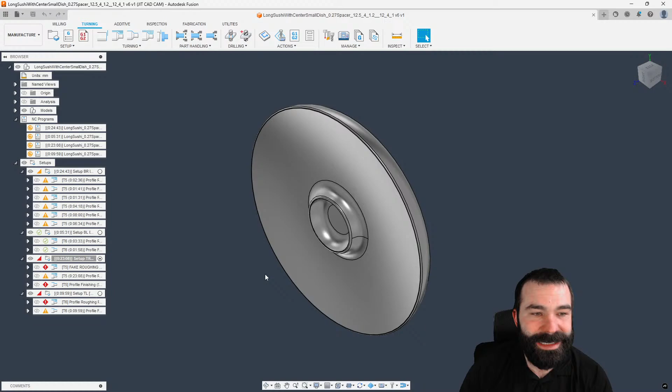So if you guys didn't know, this is kind of neat. So he's running the same kind of tool constantly across his part for all of his tool paths. And with that, he's now actually set up with setup 1, which is work offset 5. He's going in with another work offset for 6. And he's done his setup that way. So he's not doing tool changes, he's doing work offsets, right? Super neat way to go about it, like I said.

But his problem is, let me pull up his ticket here real quick. Guys, if you ever have any questions, you can use the actual support email down below. But he's trying to make a sushi board with a holder for a small center dish. As you can see, right here is his lovely sushi bowl with his center dish. I am a big fan of sushi, by the way.

That being said, his question is around the first two setups. The block of wood is attached with screws and a chuck. And I'm going to show you guys this, because in the world of lathe turning, if you didn't know, he's got some questions about a dovetail or a chuck that's holding on to some material in space. Now, I've covered this in a few of my videos, how to approach this, but what is happening is he's adding a 0.27 inch spacer. Thank you for using the inch system. And that is simply removed when flipping the part.

Now, what's happening when he actually goes into the CAM side of things is the dovetail recess that's used to grab the part, and where was it here? He had something else. So the first operation is, I'm cutting air and would have been the spacer, right? We're going to go ahead and take a look at this. So again, as you're seeing, we're starting to work on the back side of his part.

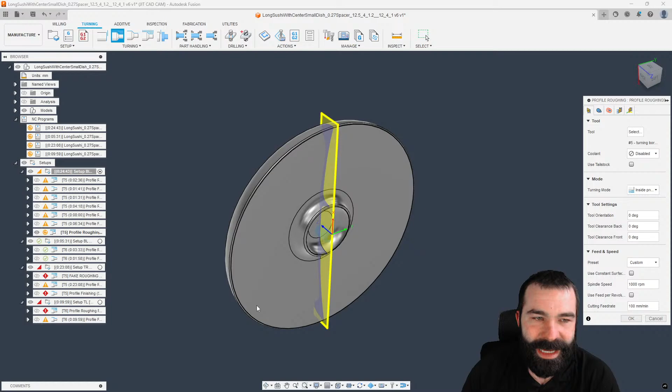But if I go up to the top and I actually recreate his toolpath from scratch, again, making sure we're still using the same tool from what he has here. So let's go ahead and cancel that real quick. I need to go down and activate the proper setup. We're going to do roughing and I'm going to hit OK. And what you're going to notice, at the very least, I actually got a good toolpath with X trimming, of course.

Now, when we look at his toolpath, the reason why he is getting that problem is he's not getting a path at all. And that's why I like to create a brand new path from scratch. And then I would go in and I would do what's called a compare and edit, right? So why is it that I'm getting something different than what he's getting? As you can see here, Fusion's going to show you anytime you have something different.

Now, again, we have a difference in our back offset. We also have a difference in our cycle and a few other things here. Our front offset looks to be the same. Obviously, we can keep going through here, allowing grooving. Yes, this all looks good. But let's go ahead and change some things around, right?

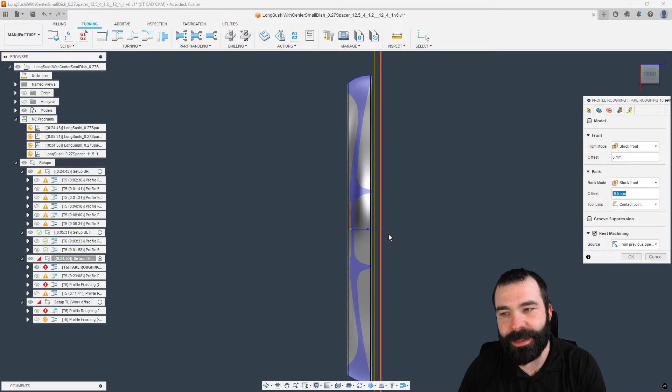So one, we have outside profiling versus inside profiling. Again, I like to start from left to right. So let's just take a glance at what he has. His geometry in this case, he's working from stock front to stock front minus 6.5. Now, as you can see, because he's using a roughing toolpath, there is no model within this Z boundary to contain that toolpath, right?

So this is where his dilemma is going to come up, because he's wanting to do his vertical passes, which means he's kind of doing a facing operation outside to inside. So if he wanted to face off that little lug that is sitting here, and we're going to model up that lug here, if he wanted to just face it off, he should have went turning face. What that would allow him to do is accomplish what he's trying to do when it comes to facing off this part.

Again, he's going to work based off our model front. We actually want to go stock front. And then if he needed more than that stock front, obviously he could add more in there. And then his passes tab is where he can actually calculate multiple stepovers, right? So as you guys can see, we can create that toolpath to go in and face off our part.

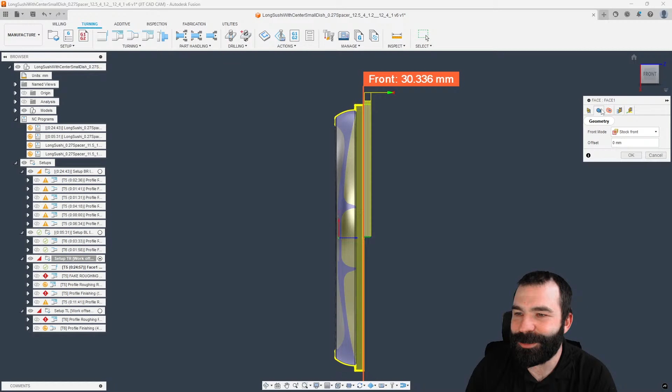Now I'm going to move this up to the top just to make sure we order this the proper way. And as you can see, we're now facing off the front of this part, but it looks like we're not actually facing to where we need to be. The reason for that is because yours truly went in here and made a couple of changes. We actually want to machine to our model front from our stock front. So let's get that switched back. Now you can see we're making those facing passes to take off that lug, as he was saying.

Cosmin, is this already looking better for you? Go ahead and let me know in chat.

Now, if he knew the size of that lug he was working with, and again, this is the importance of having something modeled, he could also change his facing if he really needed to. He could change the radii of the facing as well. So again, he has an outermost, which is stock OD.

Maybe that outermost is going to be much smaller in diameter. And as you can see, we can make some changes to this. Now, we are rapiding from a clearance. Again, we like to make small changes, but you can see where my blue lines are only cutting down here in the center area. Now, this is where I'm going to change gears real quick and show you kind of a trick why you would want to model your stock in this case.

So if I jump back to the design side of Fusion, now he does have a lovely body already drawn up for this part. He also has this very lovely sketch that he used for his revolve profile. Now I'm going to edit that sketch. And the reason why I'm going to edit that sketch is now I could sketch in whatever I wanted for a stock, right? So if anybody knows me, I love to use rectangles. They work quite well here.

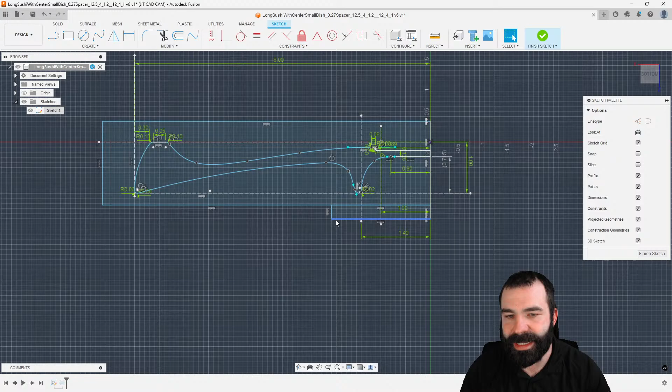We're going to go ahead and actually undo that real quick because we hit the wrong plane. One more time. Again, there's our first rectangle. And then let's just say our dovetail is going to reside somewhere in this area, right? Now I'm going to move this back, use a couple of constraints like horizontal vertical so I can align it to my origin. I also want this rectangle to, of course, start on center. And you guys could dimension this out as much as you want and get it tighter and closer, right?

Now, the idea is I need to create a second body. And that second body is going to be based off the fact that I want to spin a stock profile, right? Let's go ahead and pick our axis here at center. And then we can add in our additional profiles using control. If you guys didn't know, you could hold control. And then I would like this to be a new body, right?

So as you're seeing here, I am going to create a representation of what he's going to create based on what he's done so far, right? So again, we have two bodies here. One is now our stock, one is our finished part. And with that, we could jump back to manufacture. As you're going to see here is when you're starting to do these different machining things, right? If I was in this setup, going to use that stock body, right, from solid.

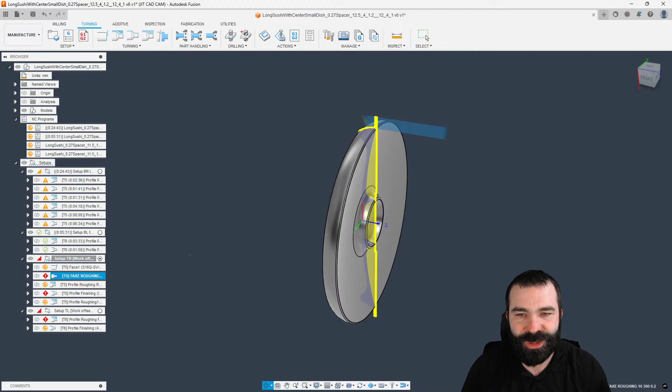Now, I would recommend, of course, you're going to start with the traditional approach of making that backside hub to hold on to. Then you're going to do the front side. Then you're going to end up back here on the back side. But what I'm going to show you is because that stock is now selected, all of our tool paths are actually going to recognize that at the end. So again, as you have that freedom, if we go and create brand new tool paths, or if I regenerate some of my other tool paths, of course, we can use that to your advantage.

So again, what he had happen here is he started to adjust too many things. And because he was using a roughing tool path without a body, he could never recognize what was happening, right? So again, we could actually set this all to model back. Again, we could set that to 0. And outside, I believe, was one of the other ones. So we want to switch to inside. And we should now get a tool path, but we're still getting errors.

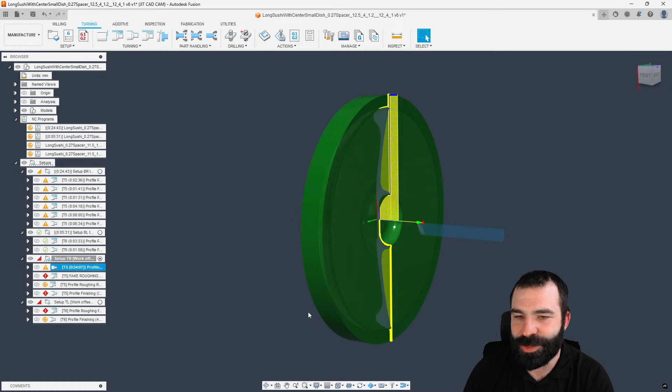This is why I always tell you guys, it's so much easier to go in and actually use a roughing strategy to create what you need or create a brand new tool path once you start editing too much stuff, right? So again, if we drag and drop, we could say yes. Obviously, I need to make a few changes here as well, and that's because we're starting not from model. Again, Fusion's trying to think that you've already faced this off. So I may want to start in this case from stock front and then work all the way to model back. Again, I know this is a good tool path because yours truly created it, of course.

And now you can see, of course, we have all the fine things like I can adjust out from here. I would like to use things like rest machining, and you'll see why this rest machining is valuable. We won't be machining all of that extra stuff, but it looks like in his case, rest machining is actually causing a lot of his problems as well. So again, we could go in, we could try a different, instead of previous operation, stock setup.

And as you can see, now that stock setup is actually trimming his tool path to follow. Again, we made that lug based on our stock. So again, we could modify this more. He wants to do vertical passes. He went outside to inside.

If we allow both radial and axial grooving, now you'll see we're starting to work down into that concave shape of the part. And we're starting to do a facing and roughing all in one. Again, because certain tool paths in Fusion are model aware, in this case, face is aware of where the front of the part is. Now, the other tool paths are all looking for a profile to machine to. That was where all of his errors come from.

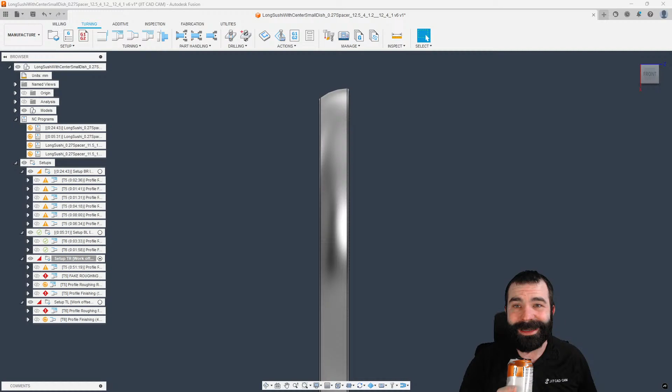In the meantime, while some of you guys bring up questions or problems you may have had this week, I'm going to snag another drink here. And I'm kind of curious, with all of you out there, how's you guys this week? How's everything going? I got a big trip planned. I got to drive from here all the way down to Texas and back to Chicago over the next 3 weeks. You guys haven't seen my post about that yet. How's everybody else this week been? Crazy? Not crazy?

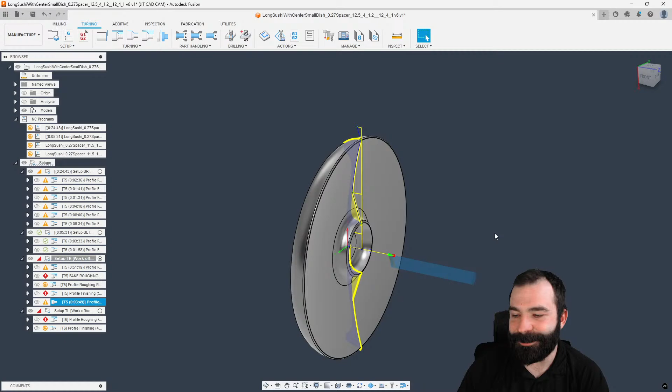Awesome. ARE, I see you out there. Cool. So you want to know about how to do a 0-point system, and with a 0-point system, how you could actually set up to do probing. No problem. Yeah, 100% Cosmin. I see what you're saying. It is wood. It is very forgiving.

So let's talk about a 0-point system. I like that question a lot. I'm trying to think what I would have. You know what? I think I'm going to go for, oh, where is it? I don't think it's Milling Monday. It might be a Fusion Friday thing. Yep. Always go for the dummy part, right? So this is a good part because it does have the ability to set up probing.

And the idea would be, with the 0-point system, you would have a pallet or you would have a known point on your part, right? So the question is how can you use a 0-point system and probing inside of Fusion 360? Well, the great thing is if I was using a 0-point system, I would probably have my WCS located on a specific point on that jig plate, especially if you're, like I said, using pallets.

There's some point of reference that can be the same on everything. Now, Fusion would need to match that, right? So what I'm going to do is I'm going to go in and I'm going to set my origin based on a selected point.

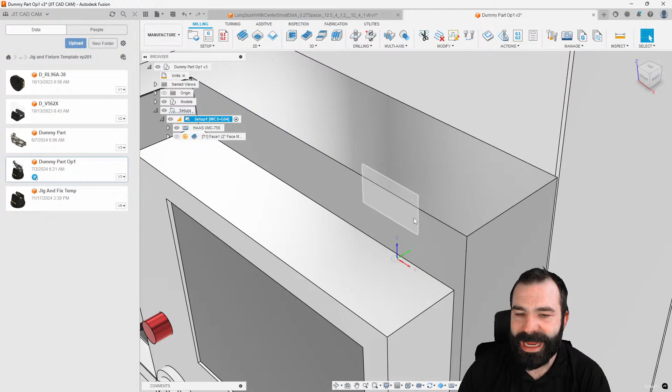And in this case, the bottom center of this actual pallet is what I'm using. I have made videos on this, guys, about using a joint origin to define that location, right? So first and foremost, in the world of DWO or TCP, tilted work plane, your machines, or if you don't have it, we can get away with quite a lot of things. So again, we have our origin set.

Now I'm going to go in and I am going to do an inspection and I'm going to do probe WCS. The very first thing I always have to do is I have to give Fusion a probe. Now that we have that probe, we can determine what kind of probing do we want to do. In the case of this part, as you guys can see, I'm actually going to pick the stock model here because I modeled stock. I know it doesn't make sense. We get it. But now I can set it based on Z or maybe X, Y, whatever that's going to refer to at the end of the day. So as you can see, it really is as easy as this right here.

And what's happening is when we go in to probe this block, we are actually shifting our work offset. So I say that because you may not want to shift that work offset, right? So we may want to use 2 work offsets in this situation. We want a consistent, well-known position in the machine, and then we want a floating position. So how that works is you have the ability to do what's called overriding driving WCS, right? So what I want to point out for you guys is you can call up a specific work offset to come in and probe with. And that work offset could be that bottom center of that fixture or that pallet, right?

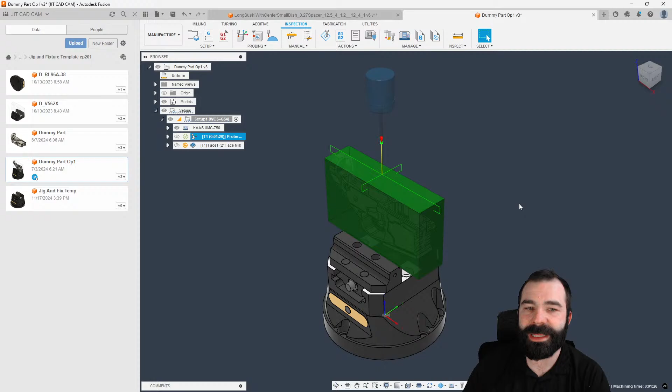Now, what does that look like on your machine controller? Well, I don't have a machine controller to show you guys, but in theory, initially your 54 and 59 would be a direct copy of the two. And then upon creating this WCS probing, you would see the shift in 54. And the reason why you would see that shift in 54 is because our setup is 54 and 59 would never move. So I like to use something like this with the overriding driving WCS.

If I had to deal with a bore or something, and that bore is kind of moving around my part a little bit, I can go in and find that bore individually each time and use a specific work offset to find it, while updating a different work offset for machining. Hopefully that makes sense, ARE. You can go ahead and let me know in chat if it does or if it doesn't, by all means.

So again, I wish there was a way I could show you guys this. Can I print screen this real quick? I can, look at this. Technology at its finest, right guys? Let's go ahead and balloon this up.

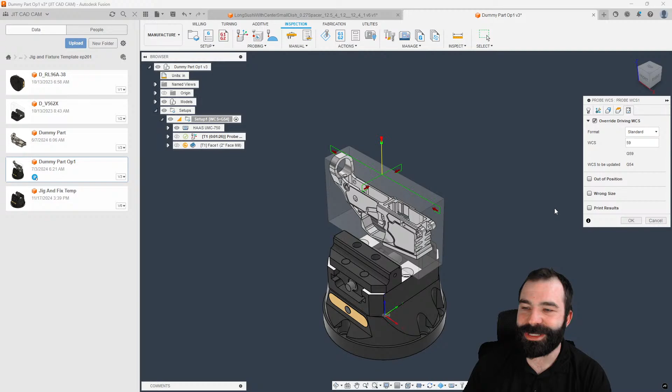What do you want to call to probe from? And then it will go back and update whatever your setup is, right? So again, usually the way I do it is you just copy one over to the other and then you let the one float from there.

In the meantime, anybody else got any other questions? I could go ahead and post this out for you also. In this case, we'll just go ahead and use the next gen post. Sometimes seeing the G code tends to help people out as well, right? So again, you can see it called G59. Even though my setup is 54, it goes through and does its probing routine, as you can see here, and it probes all of that stuff.

And then it should be updating 54, which it's been a minute since I've had to look at this code, as you guys can imagine. So it's actually S1 is the output. So S1 is 54 in this case. And we can test that to see if yours truly is lying to you guys or not. Let's go ahead and switch from 54 to 55. And then we can repost that code while we wait for some more questions to come in as always.

Again, now you're going to see we're working with S2. Why do machine manufacturers do this? I don't know. Why can't it just say G54 or G55? It's always got to be some variable that you got to track down. But again, we called that 59. We went to a location to probe. We updated basically in X. We updated in Y. And then we overwrote whatever that original work offset is.

So if we were to throw some toolpaths at this real fast, go ahead and face it. And then we're going to actually do our probing routine. You'll see it all kind of checks out the same, right? So again, we have our facing from 55. We then go in and probe from 59. And then from there, we're updating 55 still when we find that actual location. Cool. Any other questions outside of that, guys?

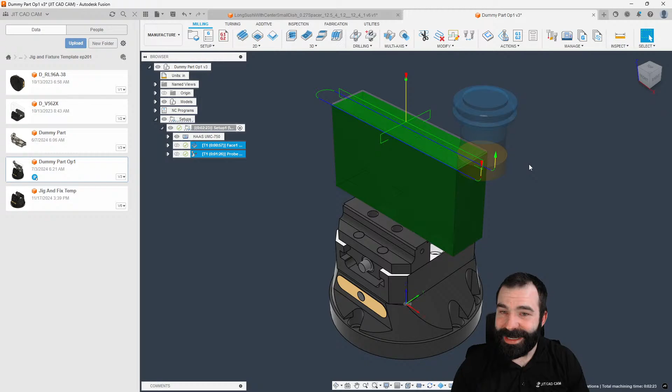One thing that somebody did ask me earlier this week is the fact that even though our actual WCS is down here at the part with probing, we are doing all of the math when we probe our part, right? So you don't have to, and I've seen this where people think, oh, well, since I'm probing top center of my stock, my specific location needs to be top center of the stock.

That's not the case. Again, when we posted that code, if I bring back up Visual Studio Code, you're going to notice when we go in and probe, it already knows how high it is in Z, how far off it is in X and Y, shifted from your WCS, and it's updating accordingly. Again, kind of a neat thing that you guys can see here. Any other questions outside of that?

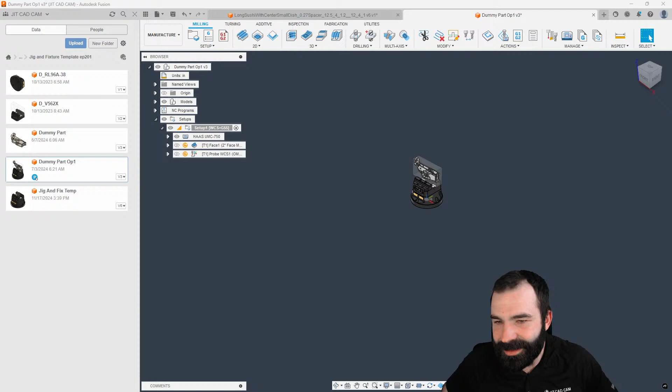What other fun stuff can we look at? Can you make a solid from your setup stock?

Currently you can't just simply go in and at the setup level—well, I could have done a fixed size cylinder or a fixed size square, and I could have modeled my stock that way. But in the case of how this part in particular is set up and ran, it uses a parametric vise that actually controls the stock and the vise, making it as real to the machine as possible.

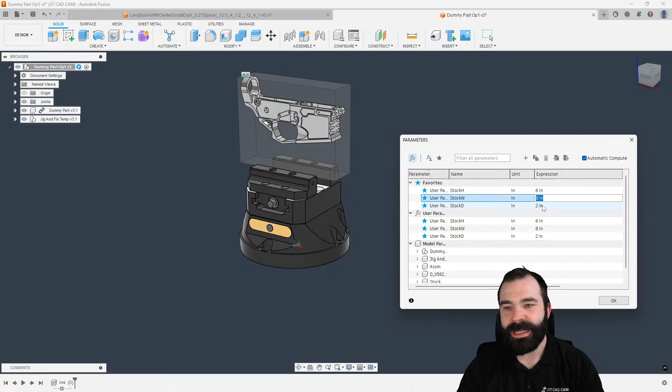With that, I could actually go into my parameters area, and this is how I control my stock on this part. Let's get this cleaned up a little so you guys can see it better. We have what's called stock H, which is stock height. So if this bumps up to 6, maybe my part is now 12 inches long because whoever ordered it is an a-hole, so to say. But as you can see, I can update that information as needed and adjust my stock any way I need.

I do things a little different when we start talking about 4 and 5 axis. I avoid using those default stock settings. And as you saw on the sushi dish, you may also need to model a stock very quickly.

Now, there is a way as you're machining, you could always export your stock. I've seen a lot of older workflows that have been changed over the years, because as you can see, now that I modeled the stock for this particular part, if I did a brand new setup, I would shift that setup over, and that next actual setup would contain from preceding and continuous rest machining.

Of course, we would flip our Z-axis here—we want our Z back the other way. And I'm going to just use that original stock box to make this quick for you guys. Then our model would still be that lower one.

As you can see, we can go ahead and change everything around. I know this machine sim's getting in the way—it drives me mad the way this one was built. This is an old one, so we're going to get rid of the machine here.

But as you'll see here, we now have the ability to go in and create that stock and move it over to the next thing. So as you're seeing me do, I'm just grabbing a facing procedure, flipped it over. Of course, absolutely butchered this model, but that's the way I tend to see it all being set up.

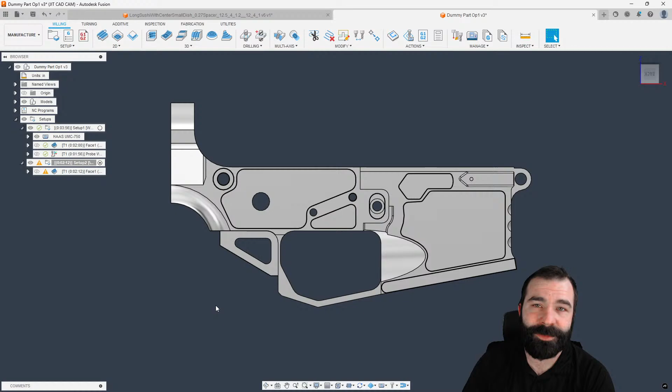Fusion has a lot of great features, and I don't know how many of you guys come from a bigger shop. I came from a bit bigger of a shop where maybe you're programming for somebody else on the floor, or you just want to do in-process inspections.

You can actually go into the inspection area, and what is really neat about this is we can create what's called a manual inspect. So for those of you out there like myself that really enjoy precision items, let's say for example on this takedown hole, I really want to make sure it always comes out to a precise size. So this could be front takedown.

With that being said, I could set my tolerance, whatever your guys' tolerance is—maybe it needs to be plus 4 minus 0. Want to add any comments or anything? Or if you wanted to record this position, just making it very easy on whoever's got to actually inspect it.

It's squared up a little nicer here, and we're going to capture that picture too. I'm going to add another one now. We're going to go ahead and go to the back one. Again, we could set that point in space, we could place it wherever we want. Capture, rear.

And I think you guys kind of get the point—you can do a lot with this. I did a really good video on it where maybe instead of a diameter you want center to center. Again, you guys have a lot of things you can do inside of Fusion when it comes to defining different holes, different lengths, sizes.

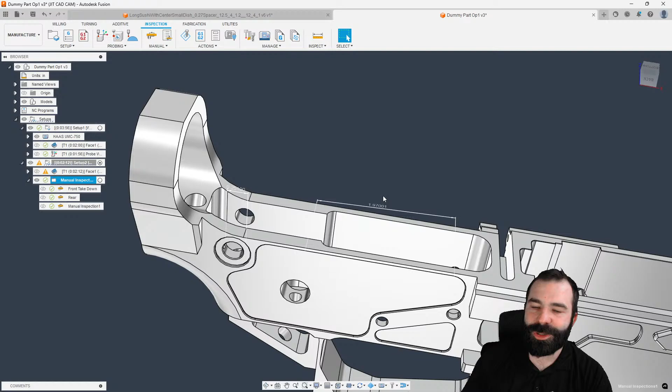So now that you've done that, now you've gone and ran your part and you want to see if it checks out. What I'm going to do is go to that manual inspect and right click, and do record manual inspections. Now what you're seeing is Fusion has automatically orientated me around to go in and type in my dimension.

We went plus 4 minus 0, if I remember. So let's say this comes out to 256. So what you're seeing in real time is what it measured.

We could do our next hole. Let's say that's 255. And then next again. And then we have our distance between centers, and again, we could type in whatever that is going to be.

So as you can see, I now have my inspection data using manual inspect against this part, and you could, of course, record this information. So this could be your first article, this could be your last, this could be your quality control, whatever you're going to label that as. But every time you go back and record those manual inspections, it's going to come out and place them so that you have an ongoing actual record of this information.

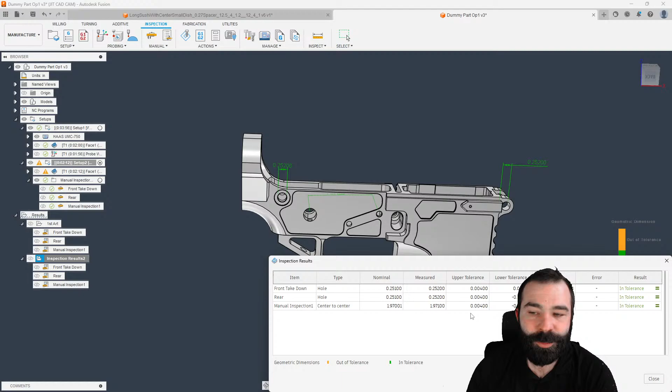You could also create an actual report. Again, we can go in and create this report, and what this report allows you to do is see that information, show that point cloud to your customer, and all of that. I think we missed a checkbox. Oh, there it goes, opening up in Chrome, of course. Let's go ahead and bring that back over and give it a second to load.

And as you guys see, there's my inspection report with my data points and things of that nature. Now, I will tell you guys, it's not a GD&T report. I wish Autodesk would give us more of those features, but right now it's very simple for a lot of you. Again, not a CMM report — you can't just probe your part on the machine and call that a CMM report. But we can actually put that data in, control that data for the next time we run it, and things of that nature.

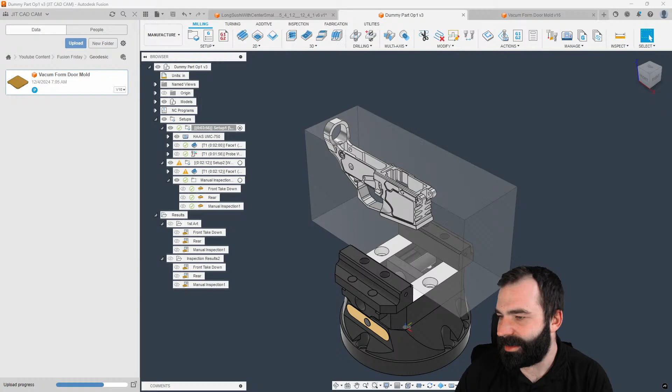And now that we have that loaded up, it's going to take a few seconds because it's bringing through the data. Sometimes it takes a little longer than a few seconds. Yours truly is over here streaming live, so it can take some time. We could always come back to this.

But what we can do once we get that viewer is we actually have the ability to toggle on and toggle off seeing those toolpaths.

Now, I don't recommend using the Fusion Team Viewer. As you're seeing, the delay here is a little crazy. I would tell most people that if you're really looking to see the toolpath, I did a video on Wednesday about setup sheets, but also the ability to go in and buy a seat for somebody on the shop floor for a couple hundred dollars so that they could do things like edit tool numbers or change some speeds and feeds.

The cool thing is, with the way Fusion works, if I delete this here, we made a change. When I hit save, I can always add those notes in, right? So you have version descriptions, like 'removed facing on second op,' whatever that employee did, they have that control inside the software, right?

I'm going to take a peek at it one more time. If not, it's still loading. So maybe we can hit refresh and speed it up. Now it's probably angry because I just saved it again. But it does look like we're on step 2 of 3.

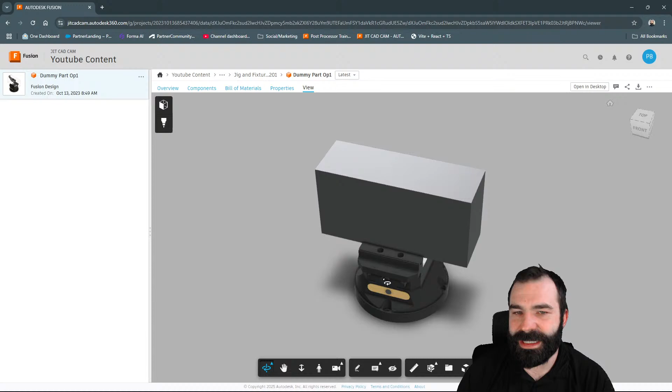Of course, now that I'm going to post-process, the other has come back. All right, bring this back over. So what you're seeing here, this is the Fusion Team Viewer. If you guys didn't know, you could see what you're working on in real time.

But if you actually go to the CAM area, you can go through and look at your setup, and then your setup will show you all your toolpaths here, right? So the bad news is you have the stock still turned on, and there's really not a good way to go through and define turning the stock on or off. If I remember, it's been a minute, like I said.

Let's go ahead and close this out. And where is my stock? There it is. You can turn it off. Look at that. So we turned our stock off now. As you can see, we could see our toolpath in the viewer.

And then what we also have here is your toolpaths individually, if you wanted to turn them on and off to be able to view them. So again, although the team viewer works all right, you can't make any changes here. But one neat thing about this is, if this is something you guys are working towards, you could actually pair this with setup sheets and have them both easily accessible from the web, right?

Ogden, I hope that answers your question. It's a little messy to get in here and be able to view it, but it works decently, right?

So again, our inspection results are also stored online here. You guys can document this all and put it on the Fusion Cloud, as you're seeing me jump around my file, right? Let's get back.

Let's see if we can exceed. In the case of that customer, we're going to actually remove the machine so it doesn't drive me mad. Go.

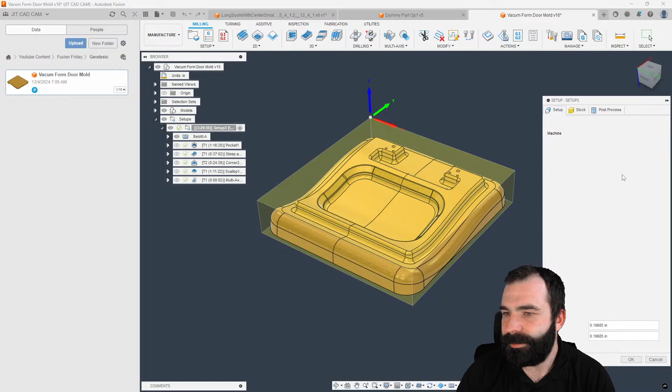So you can view each one individually, right? So again, if I go back into that part, as you can see, I can expand out and then I have my setups, of course.

So there I've just turned on the setup and then I need to go through and change things. Went down here to the bottom to the model browser. Now that the model browser is out, here's my setup. Here's that face and then that probe. And we could toggle those on and off individually.

If I also wanted to add cam setup 2, I could jump over to cam setup 2 as well, right? Hopefully that kind of answers some of your questions.

Let's go ahead and get back to Fusion now. So I'm going to go ahead and regenerate this all, now that we don't have that in there. We will probably have a few issues because we do have some multi-axis stuff. Let's remove that multi-axis real quick and make sure everything looks to be about 3-axis while it regenerates.

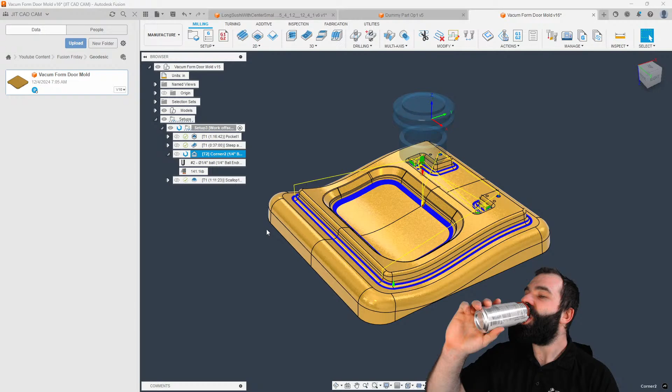Give it a few more seconds. Come on. Doing quite a bit here for rest machining. It's actually doing corner toolpath, which is another really great toolpath if you guys didn't know. There we go. So it's actually gone out and recognized all the fillets, or the corners, I should say, that are smaller than my previous used tool.

So if we post this out, what we're going to do is we are going to go to the pre-NGC post. And let's see here. Where is it? Go to the filter. Usually a little easier. Haas, milling, and pre-NGC, right? There's my post. Copying it over to the lovely file I won't get to use. And with that, we have our configurations. We also have the ability to change our format, and we'll come back to this format here in a minute.

But what I'm going to do is I'm going to post this out, and we're going to see if by default, yep, requires a machine configuration for 5-axis simultaneous. So yours truly over here has 5-axis toolpaths in this part. So let's go ahead and go back. Let's give it a machine, I guess. And then we are going to have to fake this thing out. Let's put it on a GM2. Why not, right? The gantry mill from Haas, 5-axis, in case you guys didn't know.

Big old machine. A part that is completely in the wrong area. So let's get this back on the table. There we go. I like the position of that. And we can work with that. Let's go ahead and post this again. This time we're going to swap that post out, pre-NGC. And of course we get failed, rewind, always something, right?

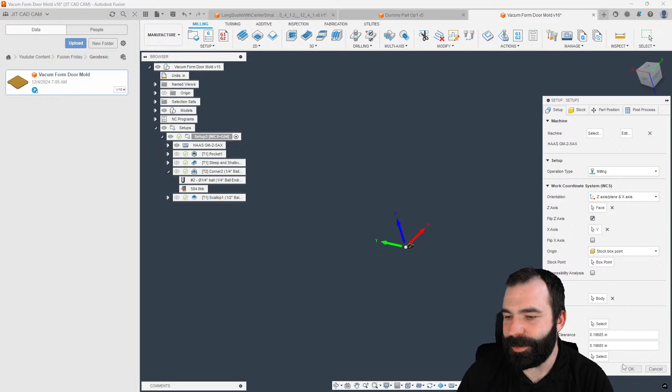The fun of this stuff, guys. You guys put me on the spot live, and I got to do all this extra stuff.

Boom. Good G-code. So what we're looking to do is to see, do we exceed? We did not exceed line 9995 as that customer. But the problem is he basically ran out of digits, right? So this is a big thing in Fusion's world, is one too many places. Again, he went way past the limit and his machine controller would get to that last N number and stop.

So what I'm going to do is, first and foremost, the easiest way to fix this in some cases is to go through and actually set your format. Let's go ahead and go back to the right post, of course. Instead of going up in increments of 5, we could change that to increments of 1, right? So by going up in increments of 1, what you're going to see is that number, instead of being like 40,000, should be much closer and much smaller, hopefully.

Get down to the bottom here. So as you're seeing, we're now only in the 30s, right? So again, we're only going up by 1 each time. I think actually we were probably over that limit before and it restarted the count. But that would be one quick way to fix that.

Now, another way we could go about fixing that is we could actually edit the post processor, right? So again, I'm going to go ahead and get that pre-NGC post out. I could go into that post. I could try to figure out where all that information is coming from. So what I would say is Control F. And then if we type in N, there's a whole lot of N's in here. So maybe we use increment. So as you can see, sequence number increment, right?

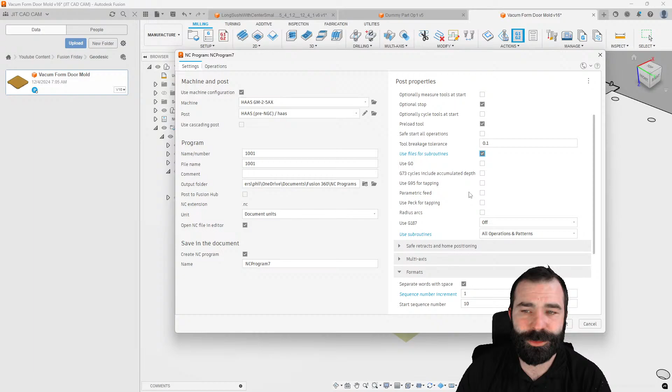Now, it's not going to work on this part, but if I was to go back to another part, and in the case of this part, let's say we have it flipped over. We're going to say we want to do multiple of these, number of instances, 20 of them, increasing by 1. And other than that lovely error, of course, let's go ahead and change our Z-axis. Make this look a little prettier for all of you. As you're seeing, we're now machining from the side here.

And if we were to hit this with a, not 2D, let's go 3D real quick. I know, 3D adaptive clearing with a 2-inch mill. I get it. Blah, blah, blah. What we're looking for is a toolpath, right, guys?

So now when we go out and we post this all out, again, using that same concept that I want to use all operations and patterns if you're using patterns. And then from that, if I actually do use files, upon posting this is going to create a lot of files. And I say it's going to create a lot of files because what you're seeing right now is the minimum information this is wanting with an M98. So this M98 is jumping out to another program right now.

But if you look at this file over here on the right, this is all this file is, right? We did 20 offsets. So we're getting all the way down to P14. And every time we're jumping out to the same file 90,000, right? So P90,000. So if we actually want to open that file up, I'm going to go into my folder. We have our NC programs here. We should see now program 90,000.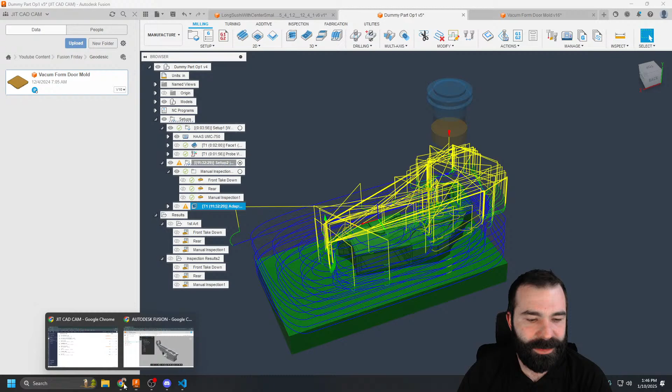Oh, and I see another question come through. One more question about Fusion Teams: when I select one operation, the model disappears. Is there a way to show it too? So let's pull it back up and take a look. I would assume if you go into your design, you'll have to turn on the model browser, right? And then you do have the ability to turn on and turn off in that window not only your toolpaths, but also your actual parts.

So if I turn my stock off, my part is missing. Well, in my case, my part is probably down below here. And for some reason, that is wrong. So where is it? Dummy part, of course. We want to turn our dummy part on because that is the part we were machining. And if we bring out that CAM, we want to see our CAM. So we're going to go ahead and hit setup one.

Hopefully Autodesk watches these videos. I actually do know they watch these videos because they have been corrected a few times, but what are you going to do?

But now if we open up the model section again, you can see I now have that setup, right? So I can turn off, a little ugly. Say we just get the jigs and fixtures out of the way, and then I can turn on and turn off my toolpaths. Of course, view it a couple of different ways if need be, right?

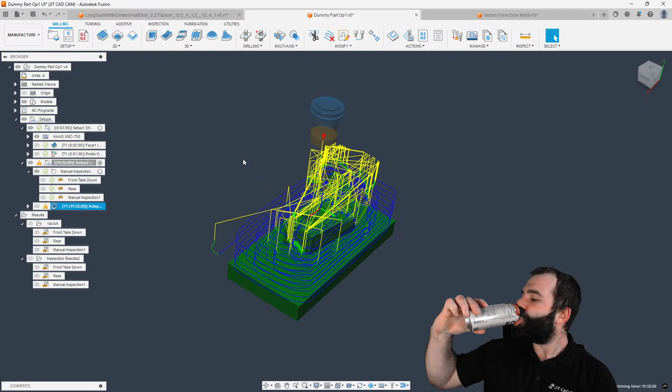Maybe it's time for the break, the midway break. Should we take the midway break? What are we thinking? I don't see a lot of questions coming in, so either you guys are changing out parts or just skating the day away. How many of you out there have convinced your company to allow you to come watch this versus do real work? You got an attendance sheet?

Go ahead and play around with this part a little bit more while we wait. Go back to what it should be. Okay?

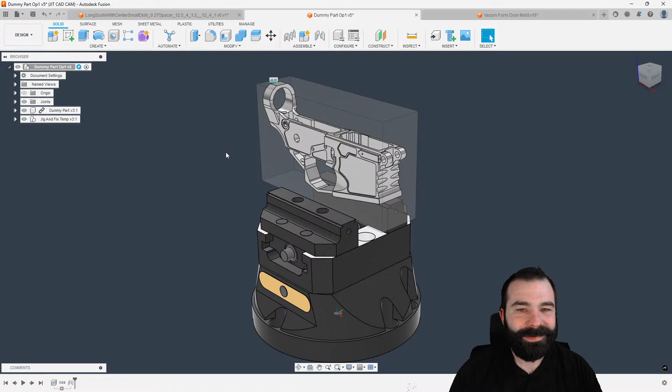So as you can see, we have a part here. Jig and fixture has all been designed up. Again, do you guys remember the old days? I remember this. When you would try to machine something like this, but you would want to avoid your vise, you used to have to make like the windows, right? So you could come in and you could say, I want to machine this, but I don't want to machine this area and all of this fun stuff. What happened to Fusion? You know, you guys don't have to do this anymore. That's why I'm going to show you this.

So what I'm going to do is I'm going to trim out this lower section now. So again, if you were machining a part like this, when you would go in and do something like adaptive clearing, you would actually say, I want to do machining here, but I want to do a selected stock boundary. Or you would leave it as a silhouette from your stock, and then you would do a selected machining boundary, right? And then you could say tool inside that boundary.

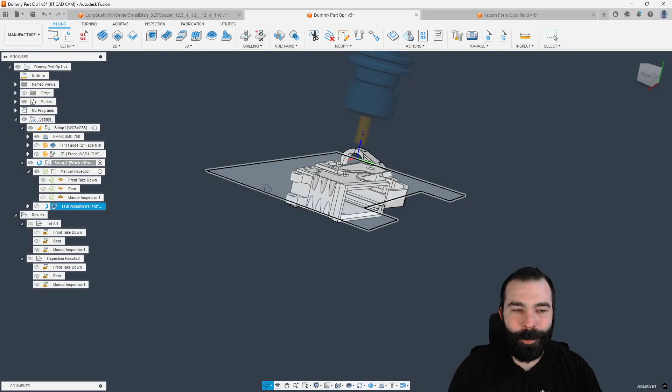I'm going to go ahead and switch tools out for this. Let's go back to my lovely shop crib, grab your guys' favorite end mill. And now, because we've forced this to avoid certain things, the idea is that we wanted to avoid our vise, right? So we don't want to get too close to our vise. We don't want to smash into it when we machine this. What I do need, though, on this specific part, I get to turn that vise on and add it in as a fixture. Let's go back in my setup.

You want to include, in this case, somebody designed this fixture wrong where we only want certain things. Nope. I think we got another stock box later. Pop up very briefly. Maybe I'm crazy. It's been a long week. All right, cool. So now that we've given that a fixture to work with, we'll regenerate that. But the idea is with fixture avoidance, we're automatically going to keep that tool away and avoid hitting it.

Is there a way to fix the simulate comparison when using a modeled stock? I need a little more information than that, Deep Thinker.

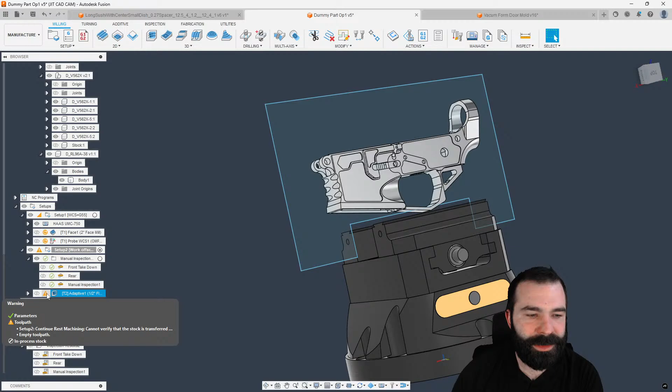Again, we're getting yelled at here. Let's see why we're getting yelled at. So we need to go ahead and go remaining stock. Nope. A coil cutout on a shaft. Yeah, we could look at doing something like that.

So let's go ahead and see what we have. Rest machining cannot verify the stock is transferred. Oh, because we didn't update our other tool. First, go ahead and do that, and we should get that fixed. Again, we're going to give this a few minutes because we're now using avoidance inside of the software and keeping our tool away from that jig.

I'm pretty sure yours truly has something selected wrong in the setup. Let's go ahead and look at that fixture. Yep, it's like I thought. It brought through the stock. We don't want the stock. We want these couple of bodies, and then technically our riser would help. And let's go ahead and regenerate.

So you want to model a coil cutout on a shaft. One coil is right-handed, the other is left-hand. Both start at the same point. Manufacture using a ball end mill.

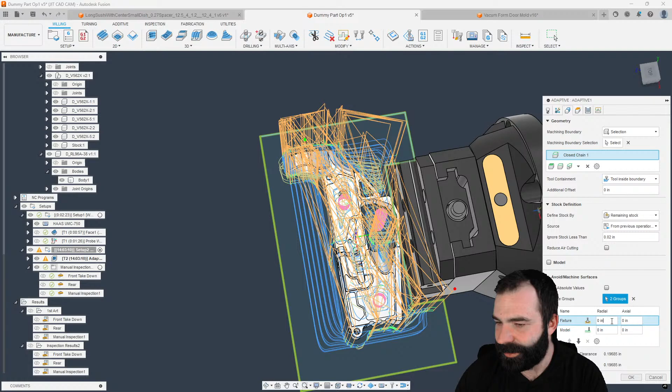Remaining stock. What we're going to do is remove that boundary and see if it gives us a little different detail. But if I had to model a coil on a shaft, there's a couple of things I would use to do so. Again, I would tell people that there's a difference between modeling something and machining something.

So first and foremost, if I had a cylinder, let's just go ahead and make our cylinder, take these easy numbers here, and then let's just say 6. Okay. Now, if I wanted to create a coil, we're going to start that coil down here at the bottom, making whatever that diameter is. And as you can see, whatever your coil is going to be at the end of the day, you can set that based on how you model it, right?

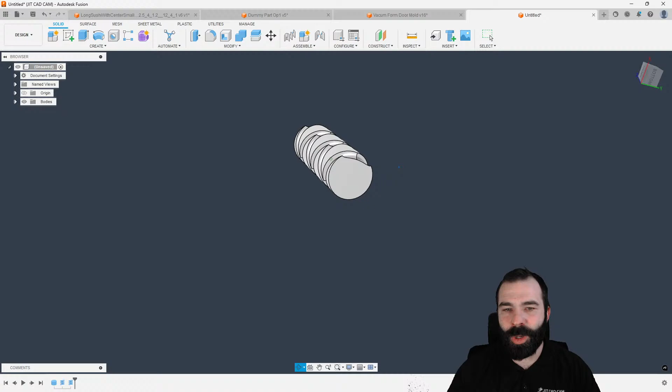Now, one cool thing is you could actually reverse direction of this as well. So if I start with the first one here, and then I go back and create another coil. Again, same face, same diameter. And now we'll drag it up at 6 inches. And then this time we're going to reverse it, cutting it back the other way, right? As you can see, we now have 2 coils that go up our part, both starting from the same point, basically, right?

So now to machine something like this, the question always is are you going to machine this based on center line? Like, is your ball end mill the same as this actually wrapped path? If so, you may actually want to model this a little different. Now, what would be beneficial is if you could figure out a way to use an edge for that toolpath. I'm going to drag back my toolpath briefly. As you can see, I now have a very lovely edge to be able to use for programming a toolpath.

So if I didn't have these 2 little pieces on the end, just highlighting and hitting delete, I now have that straight helical cylinder, right? I could use that to my advantage when programming. And then I could create technically a second cylinder if I wanted. If I go ahead to do some magic here of a copy and paste, again, this is the fun of how your design tree changes everything you do.

So I'm going to roll back my history, copy and paste, right? We have now 2 cylinders here. If I roll forward far enough, what you're going to notice is that one still has both of them on it. So again, we go to that coil. I'm actually going to change what part is being cut. We're going to uncheck body 1 and we're going to check body 2 here.

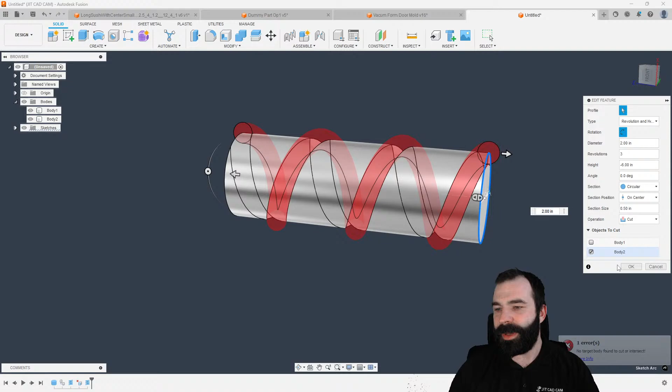And we're going to turn off body 1 because we want to remove these 2 corners, right? So what I have done is created 2 separate bodies that are going to now spin and revolve themselves upwards, right? So you have a left spin and a right spin, if that makes sense. So again, I can use each body individually to create this toolpath.

So let's jump over to the manufacture side of things. We're going to create our setup, of course. Pick our Z. Z would be based on an up direction. X would more than likely be running down the center of your cylinder. And then in this case, we're going to just go ahead and place on center at the end of our part, right? Go ahead and swap our stock out just to make this a little prettier. Cylinder, select my axis, everything rounded up by 0. So it's almost as if it's already there.

Okay? So now this is where in certain toolpaths, again, 2D contour, for example, you have what's called a wrapped toolpath, right? What I'm going to do is wrap a toolpath around a cylinder. I'm going to pick my contour. So this is the important part, right? I need to have a contour for my toolpath to follow. And now I could do an extension here, say 0.5. What it's going to do is extend both ends. You could extend one end separate from the other. But the idea is we're going to use that actual contour for our toolpath.

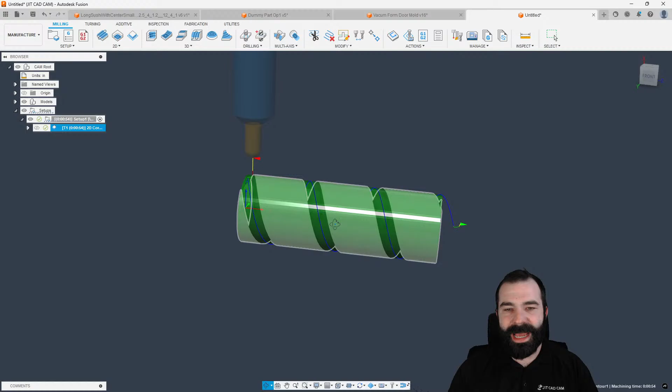Let's go in where we find out yours truly probably put the wrong size tool in there altogether. And now you can see I'm following, right? I'm following that contour with cutter comp. So again, I'm going to jump back to design here because I think I made a 1/2 inch diameter. Okay, we got lucky here, right? So if I wanted to cut that on center and I only wanted to do it with a couple of passes, all I need to do from here is, one, we don't need lead in and lead outs. So we could turn that stuff off.

And then I could use stock to leave if I wanted to lower my tool, or based on my heights, a selected contour minus, in this case, if it's a 1/2 inch tool, it's a .25 radius, or you could actually type in tool_diameter divided by 2. That would also give you that dimension, but we need that to be a negative. So we're going to divide it by -2. What you're going to see is now it will lower that actual line to wrap around our part, right?

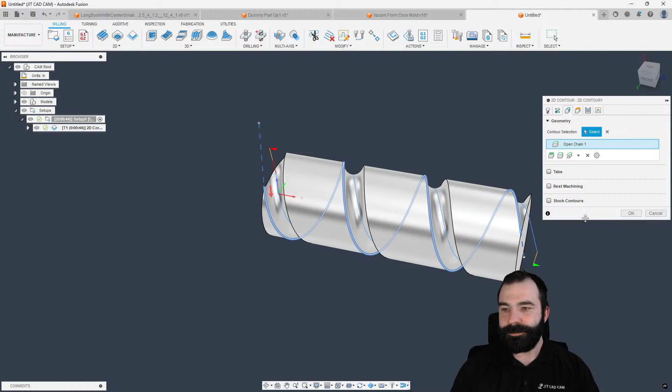So as you guys can see, we need to extend, of course, our lead in, but our lead out looks okay. Again, we're going to go back into our toolpath, geometry. Let's go ahead and start 1.5 out, end at 0.5. And as you can see, we're now starting basically off of our part. Might want to extend it a little bit more, but I think you guys are seeing this, right?

So now that I've done one, what I could do is copy that entire setup if I wanted, paste it, of course, or in this case, I need to duplicate and swap my models around. Again, we're going to go up to our model. As you're going to see here, we're going to grab this other body now. And with that, I'm going to go ahead and swap my toolpath chain. So again, we just need to change from one to the other.

Now, as you can see, I'm machining back that other way, right? Again, guys, we can adjust our lead in and lead outs. Don't hold me accountable on that. But it's still the same concept that you could machine one way, and now you could machine back the other way. And I'm going to go ahead and hit F8 here, getting rid of my stock. And then I think we could just turn off our body.

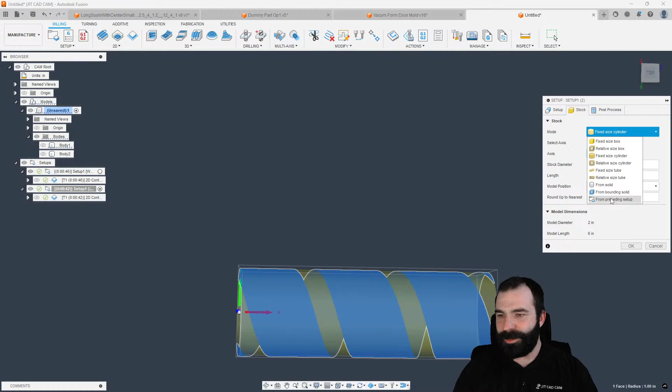It's going to be weird to see, but you can see that double helix as it wraps down our part, of course. Not the best of views. But if we turn on stock, we should be able to see that, as you can see. And again, we might even be able to make this a little bit prettier. Go ahead and say from preceding setup. And it will not verify the stock transfers. So I don't think we're going to actually... Oh, nope, I think we are. We might get lucky here, guys.

Go, and boom. There is your double helix down the part using 2 separate models. So I hope that answers your question, Deep Thinker.

I see you sent in a part. Let's go ahead and jump over, I'm assuming you sent it to my email. You did, awesome.

I get all red on top, not correct in op2, okay. Go ahead and get back over here. You go to the good old-fashioned Free Support Friday. We're in 2025, this is how I mentally make notes on what day, what year it is anymore. So we're going to go ahead and grab that, intro to 2D machining, and get that uploaded.

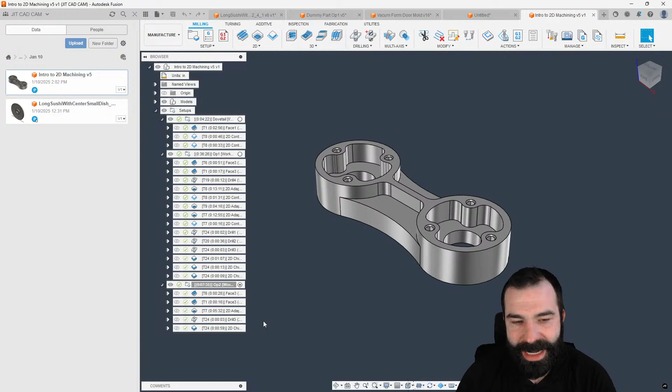So you were doing a part here. Now what it looks like is your stock is from preceding, okay. And we just got to run through this real quick to mentally see what you got. You put a dovetail on the back, beautiful. Now machined everything on the front.

Now I assume you're at that point where you're going to machine your dovetail off the back, right? What, Deep Thinker, which one were you having a problem with?

Again, you have a modeled stock, fixed size cylinder. Oh okay, I think I know what you're... Okay, so here's your model, right? So that's what you're machining in your first setup. Then your second setup, you do not have your model selected as your stock, right?

So when I go into op1, my stock is actually not a fixed size cylinder. It's going to be from solid, and that solid will be your modeled stock, right? So if I go into your bodies here, here's your dovetail. I'm now going to define that as your stock. What that is going to do is regenerate everything, and what you'll see is all these tool paths are now reflecting that you still have that little shoulder down there for your dovetail, right? As you machine through this.

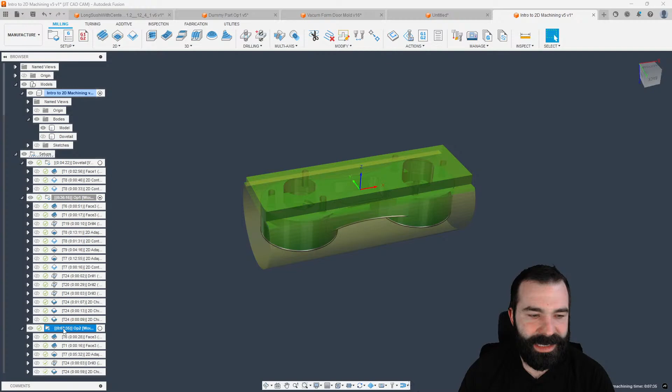And then in your next setup, your op2 setup, you have from preceding, beautiful. And what you're seeing is that silhouette of your stock has now come through in real time, right? So again, as if we regenerate our toolpaths here, as you can see, all that stock has disappeared. And if I was to simulate this, go ahead and give that a sec. You can see, don't want operation, we're just going to do comparison. There is your stock with your dovetail and all your holes from everything you've done before.

So in your case, you need to treat it a little different mentally, right? Like you're machining in the first setup that physical body, and that body is what you're using in a later setup to define your stock. So that was the only problem I see here. Everything else looks more than adequate. Everything checks out pretty good. There you go, I think that would fix your problem overall.

Let me know in the chat, Deep Thinker, if that helps. We're up to 21 concurrent viewers. You guys, 21 of you guys are out there not saying anything in chat. So either you're absolutely speechless that I have no idea what I'm doing, or you're just trying to skate the day away, which I don't blame you. That hourly employee life is the way to go.

You guys really want to make no money in life? Start your own business like I did. It's been nothing but an adventure. I think that's a record 21. 21 on the day, I think the most we've ever had was 24 at the same time. But let's see if we could scare some people off, of course.

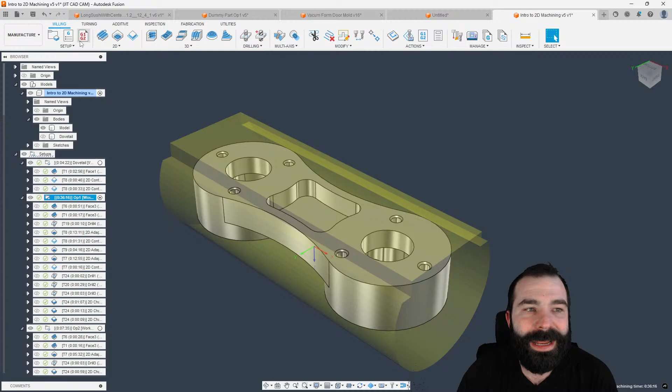Have I ever tried? Yes. So I've machine scanned objects, and when I'm on the road, I'm going to get you guys some really good content because I have a lot of customers reaching out about this. I'm going to start a new segment, it's called Scan to Cam. So the idea is taking a 3D scan, and usually you don't want to work with that STL file or that mesh, but how you guys can go through and let me see. I don't actually have a good part here, but a lot of it from a high level is going to be the ability to go in with your mesh, repair your mesh, fix your mesh, clean it up. Now, I will say, depending on what you're scanning, a lot of scanning softwares have a really powerful mesh tool to start with reduction of facets and stuff. However, once we get it to that point, it's usually easier to go in and convert it back. And then once you get it back to a solid model, way easier to machine it, of course.

Now, I did do a video that you can actually speed up toolpaths in certain situations. A lot of the new toolpaths don't allow for it. But if you were to convert your model to a mesh, you can machine against a mesh, of course.

Yeah, 100% Bogdan, you're pointing it out completely. So I actually had a few, I think somebody mentioned that last Friday, right? Somebody brought up the idea that, hey, I am machining this part. No, it was you, wasn't it? You're machining that part that you're going to build up a weld on it. Let me go back here. Support January 3rd, where's that part? Here it is. Yeah, it was you, Bogdan. But yeah, you're right, so in Bogdan's case he kind of pointed out something really, really valuable about that.

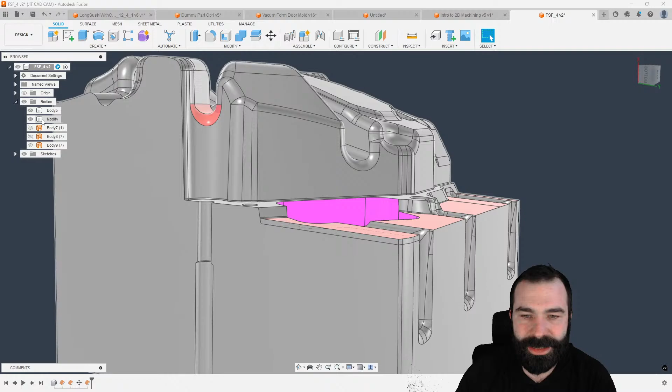This would be a perfect use case for him because we talked about this last week where, as you guys will see, I have 2 models floating around here, and I'm going to go ahead and change our opacity here to see this. But as you can see, there's this landing here. So in the great world of mold making, occasionally they get smashed, they get worn down. He wanted to machine down these red areas so that they could rebuild up welds on all of them. And then he's going to remachine it back to its original. So in his case, yes, being able to 3D scan something like this and create that model from the original model, the post machine model, the welded model, all of that stuff, right?

Don't we all wish we had a 3D scanner, right? I'm going to put that on the Christmas list. Anybody wants to be top tier donator, buy me a 3D scanner. They're only like 10, 12,000, right?

I think a lot of it comes down to looking into the resolution of the scanner and the application, right? It looks like Harm has one, Bogdan. You guys might have to talk a little more offline about it.

Anybody have any other questions outside of that? Adjusting some of my camera settings here real quick. There we go. Did I miss any other questions? Let me get scrolled up here.

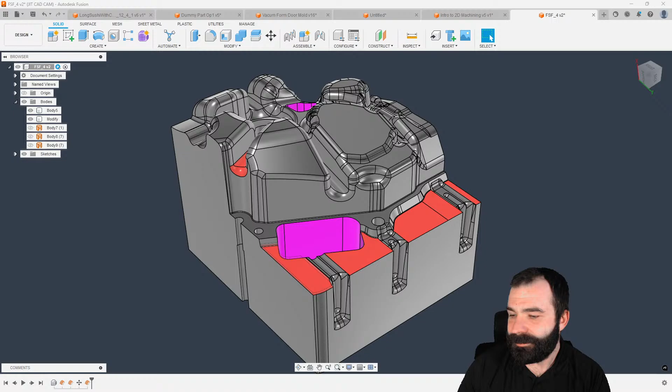Bogdan, it is completely possible to compare 3D scans. Faro has been doing that forever, where you could take your original model versus the scan and overlay them to see the difference. In your case, if you're doing something like this mold that's smashed, you would need to scan before and after. Once you convert it back to models in Fusion, you're 100% able to go in and machine. In the world of Fusion, once they are converted, it's going to be a little tricky because the tessellation of each one could be dramatically different.

I got one for you guys — you may not know this, I made a video on this. Bogdan, I think you're the one who reached out to me about creating the cylinder stock around this part, or putting a part on center of a cylinder for machining. If you guys didn't know, you need to model stock in certain situations, and this is a good example. So if we were to go in and create a setup on this part — I think I showed this.

So my stock, if I do a fixed size cylinder and I say select axis — I don't actually have an axis on this part to pick to create that revolved cylinder shape. Now if I pick this down here, this doesn't actually center my part. So this is where modeling your stock is going to be your absolute best friend, but there's a secret to it. If I jump back to design on something like this, I'm actually going to take this part here and duplicate it.

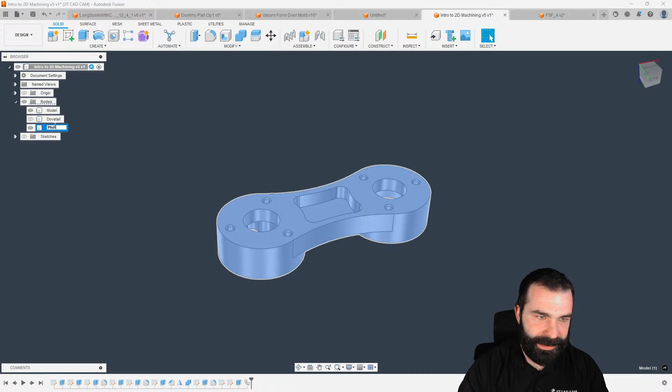So we're going to go ahead and copy and paste. And this is going to be Phil's stock, right? Because this is my change to this whole operation. And under modify, I'm going to go down to simplify. Before I do that, though, just to be precautionary, let's go ahead and turn off the original model.

So let's go to simplify. And what I want to do is I want to replace this part with a primitive. So if I pick this part, I can actually go in and say do a cylinder. And as you're seeing in real time, it's creating a cylinder based on the dimensions that I want, right? So again, as if this was 1 inch, actually it's going to be 2-inch diameter stock.

Notice how it's going to replace my part based on exactly that. So it's literally going to take whatever your shape is and do a cylinder directly on center here. So now that I have that, again, it created a component for me now, but I have my original part in the background versus that cylinder that I just created in real time. So again, kind of a neat thing as you guys are seeing here.

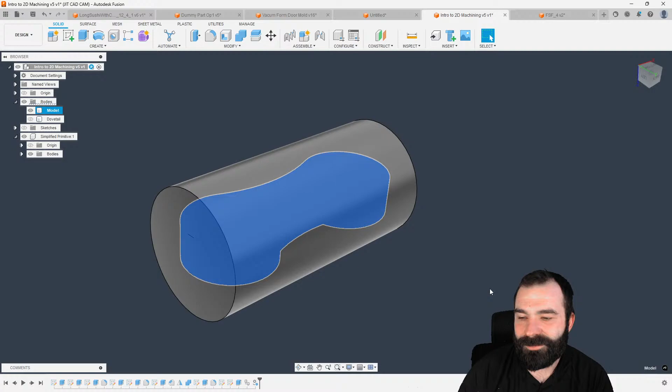I see that Thomas has another question about going back and forth. So your cylinder goes all the way down and then it stops and it comes all the way back, right? But yeah, so as you guys can see, you can use that simplify primitive to create your stock body. Let's go ahead and just change our opacity here. So now that cylinder is perfectly around the shape of this part in this case. Again, a quick way to cheat and get that set up.

So on the cylinders, let's go ahead and go back to manufacture. We're actually going to go back to design. And let's go ahead and get stuff turned on. So his question is he actually has a closed loop that spirals down and then reverts back the other direction. So I need to fix my model here. What I'm going to do is I'm going to remove those couple of delete faces. I'm also going to remove when we went ahead and created that second coil. Boom. And now we can create.

What I'm going to do in this case is we're going to extend our actual shape, right? So as you can see, our height, we're going to do things a little different. So I'm going to start with a new file. I think this is just going to be easier for you guys to see. Go ahead and open a brand new file. This time I'm going to create a cylinder with a circle. And the reason for that is because I want to do a two-sided extrude, right?

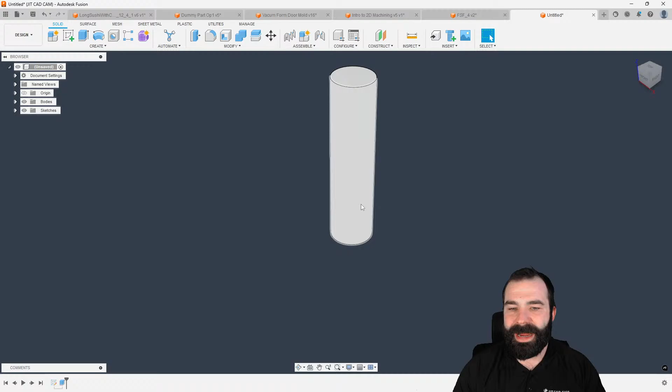Again, if I wanted that coil to go a certain length, in this case, I'm going to still use 6 inches, but I am going to set the overall length of this cylinder to 8 inches, and I'm going to do so by doing 7 inches above, 1 inch below, right? And the reason why I wanted to do this is because I need to model that coil. When I create that coil, I can place it on that plane starting 1 inch from the end, right?

So again, we could go ahead and create whatever that diameter is. We know it's 2 inches to center line. I want it 6 inches long. And again, that's going to be center line to center line. So the center of our coil is what we're measuring from. Again, I'm going to repeat exactly what we just did. Same location. Go ahead and drag that out, put our 2 inches in, drag it up our 6 inches, of course, and then we're going to reverse our coil.

As you can see, we now went one way and now we went back the other, creating, again, that profile in the middle so that you can loop down and loop back. Now, this is going to be a little tricky because we don't have an actual chain that is linked from one end to the other, right? Now, depending on how he wanted to machine this, he could machine each one of these, so to say, diamond shapes here individually and then jump from one to the other.

Another thing that can be done is, when he does these coils, instead of doing a cut, we could do a new body. And with that new body, we could actually machine, again, using those lines on the actual coil body.

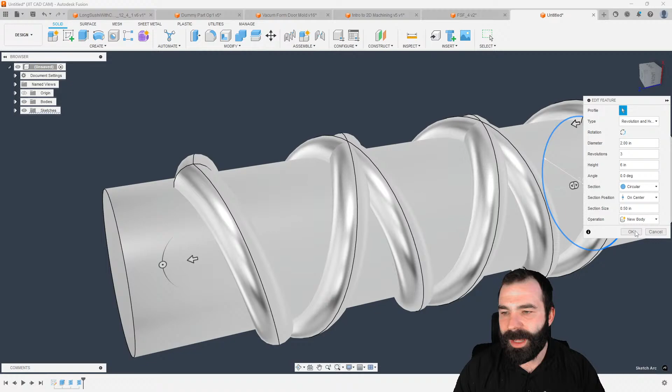And in this case, as you can see, as we have that edge on the top, we would take that tool diameter and sink it down. So again, if I go to that other coil, same thing, new body. I now have my 3 bodies, right? We have our cylinder plus our 2 coils. I could do a combine between those 2 coils if I wanted. And if I really needed representation here on the actual cylinder, I would do another combine.

Now my target is what I want to cut. My tool is what I want to use to cut. I want to do a cut. And then I want to keep the tool, right? But as you can see, if I turn off the actual coil, I now have my pattern, but I can steal this actual edge and use that as my chain for my tool path, right?

So again, we're going to switch from design to manufacture, create our setup. The axis, of course, needs to go up. Let's just scroll out a little bit so we can grab that base. X is around cylinder. We're going to do a selected point again. So again, we're rotating around center. My body is strictly just this cylinder here.

We did a cylinder also. I don't think I can say cylinder any more times.

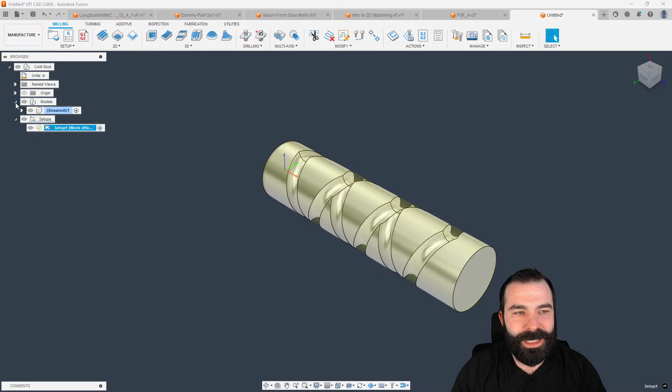Oh, nope, we got to pick our cylinder as the axis. Round up by 0. So there's our part to machine. Now we're going to use that body that we have to create our tool path, right? So again, our 2D contour, we're going to wrap it around, guess what? Waiting for it, chat. Cylinder.

And then we are going to pick now our contour selection. So as you can see, by default, it wants to pick that entire loop. So I'm going to hold Alt. What that allows me to do is pick that first chain. And now I can wrap that chain around manually all the way down to the end of my part. As you're seeing me do, I'm just rotating my part, continuing to select that chain as I get to that other end.

Again, we are going to go a selected contour minus, in this case, 0.5. And of course, we want our tool. 1/2-inch ball end mill. Hopefully, I still made a 1/2-inch coil, right? Now, keep in mind, we're using the center line this time, right? So we need to be aware of what we are picking.

So I'm going to go back into that tool path, and we're going to turn off cutter comp. So this will actually move my tool onto center. We do still have a little bit of lead in, lead out. And if I move the coil out of the way, I think you guys are starting to see that tool path all the way down and back, right?

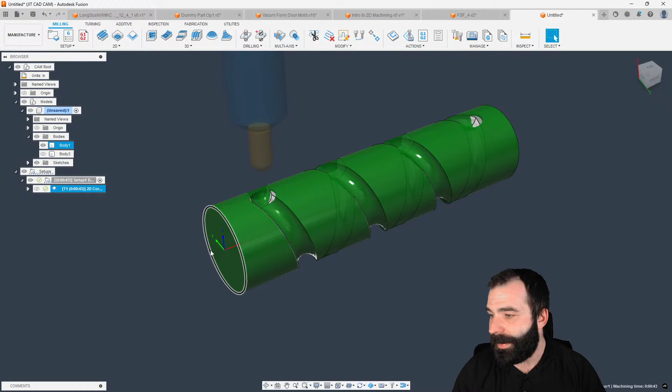Now, I do have to point this out. Some of you are probably questioning, well, can you continue that to come back the other way? You can to an extent, but just know in Fusion's world, you can't do a full 360 from one end to the other, right? So as you're seeing, I can't actually select that next chain coming back the other way. It doesn't want to double back on itself.

So again, it would still be very valuable in this case that we're not going to use lead in and lead out. You may want to use a ramp instead to be able to ramp down as you spiral around the part to create that tool path. And again, I'm getting an error here, and that error is that you can't do a ramp based on that zigzag, right? So we may be stuck with doing strictly just a plunge right now.

And if your groove that you are cutting is technically larger than what you're doing here, this is where we would start to look at doing something like a rotary pocket or our rotary contour to finish out that groove, right? So again, at this point, I could just take that first go around, copy paste, or duplicate, Control D, change my chain from one way to the other chain, again, unselecting one.

I wonder now that I think about it, though, can we add both chains in at the same time, right? That's always a curiosity of mine when we do stuff like this: do I have the ability to put both chains in this part together, right? Again, we're going to go ahead and loop this guy up and around, back and forth, back and forth. And let's see what we get for a tool path.

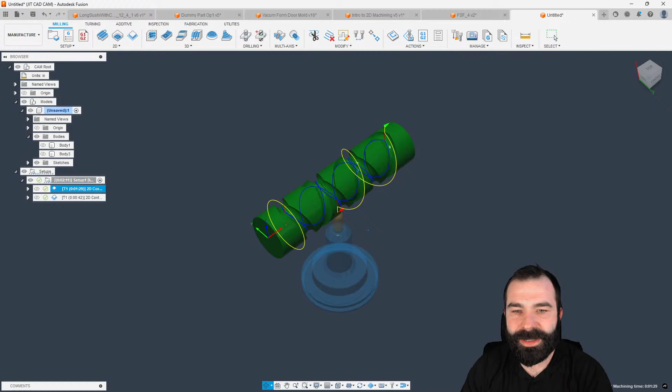Let's turn on our tool path. So there's our F7 to turn on our tool path. As you can see, it's now starting in the beginning and going from one end to the other. Of course, it's retracting at some point. Again, not a perfect example because I assume there's probably some fillets out here at the end to blend these

corners in. But again, this is just a little different approach to something as such where I'm using a body or an edge on a body that is just a dummy part to throw away to create that profile. Cool. Any other questions outside of that?

Go ahead and open this up to you guys at any time. Meantime, I have to shoot back an email real quick to somebody. If you guys have any questions, feel free to throw them in chat. Any of you guys down in the Lincoln, Nebraska area want me to stop in next week? Let me know. I'm going to be basically in Lincoln and Omaha all week long.

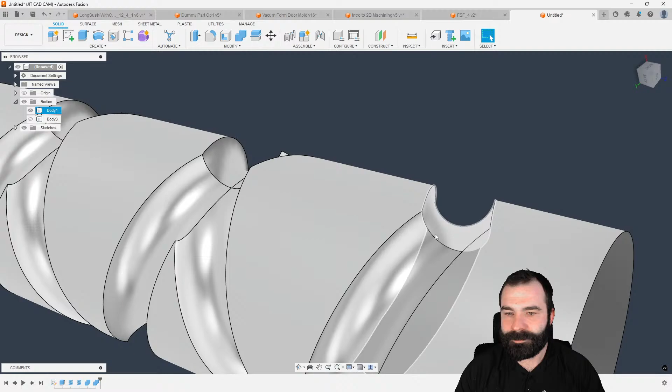Man, I tell you, it seems like this stuff goes by so fast. I think, what do we got? We still got another 20 minutes left. Guys, have any other questions outside of this? Any other wild stuff you guys want to try to subject me to work with? Blend the inside one. I'm no modeling expert, if you guys have ever wondered. Going once, going twice. Any questions? Any questions whatsoever? Anything in particular you guys want to see? Anything you're curious about?

You guys want to see one that probably will help you guys? So if you notice on this machine sim for this particular part, when I go in and I try to do stuff inside of Fusion, notice how I can toggle on and toggle off show machine. This will make your life much better at the end of the day. So every time you click on that setup, your machine no longer gets in your way because you've turned off the machine and machine visibility.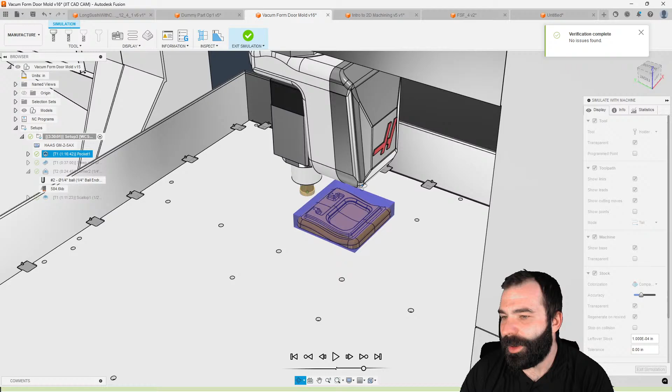Now, when you go in and simulate this, though, we don't want to do a normal simulate. We want to do a simulate with machine. Now, your machine has come back, but one thing to keep in mind is you have what's called a base as well. So, depending on how your machine sim was set up, and in the case of this machine in particular, you probably don't want to see all this extra stuff, right?

So, again, you can change these machine sim files and set them up so that you only see the things that you want to see when it comes to manufacturing, right? And I'm going to say this up front, you cannot go out and hit edit here at the machine in the file you're working on. You'll see, if I go to model, I cannot replace or edit because it's currently in use inside this file.

Now I can go up to the top of the machine library. I can find that machine I'm using, and as you're seeing, because I'm in my recents folder, I can't do anything with that. Now we could go out to wherever that actually sits in Fusion. Let me see if I can find it here. So there it is in my Haas folder. Now I can edit it at the top level in my cloud, right? So again, we could go edit machine builder.

And what you're looking to change, just so you guys know, is anything that is the static or what's called a base is considered the item that can be toggled on and toggled off when you're in that machine sim setting, right? So based on how that machine is built here, as we can see, this entire thing is all of the x-axis, right? Well, in this case, whoever built this has put all of these additional pieces in here. And again, it's nothing against whoever did this. It's just the way the machine was built, right?

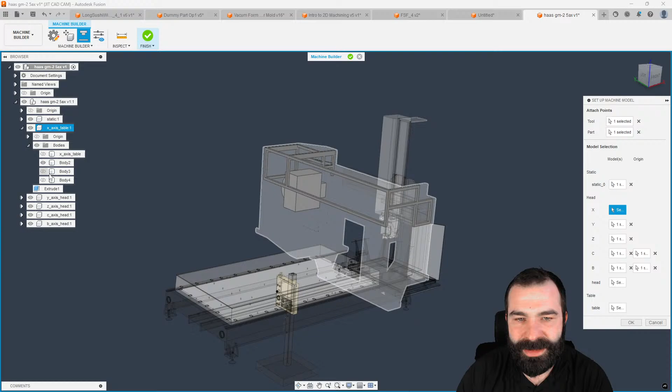So if I actually change this out, I'm going to unselect everything. And I only want, in this case, let's just grab that welded gantry, right? Well, I can't grab strictly just that gantry because it's a body and it keeps wanting to default back to the entire component. So this is the rabbit hole that you get into when you're trying to do some of this stuff, because you now need to go back to design, of course.

We need to go to x-axis. We need to convert this guy into a component. Now that it's a component, I can then select that component, if I can find where it put that component, of course. Let's go ahead and undo that real quick. We might have to cancel this and start from the top.

Yep, let's go ahead and cancel, and we're going to do that all over again because the timeline was not turned on, right? So again, we're back in Machine Builder. We go to Design, capture our design history, go to that x-axis, find the body we want. I just want to see, yeah, that's the sheet metal. So what we want is we want to go in and create component. Now that we've created that component, we could select just that item, right?

So it's a little bit of a mess, but if we go back into Machine Builder, we edit the setup machine model, we can now define what X we want, but what you're noticing is everything has disappeared now, right? So you're kind of like up a creek without a paddle, which makes this more and more fun.

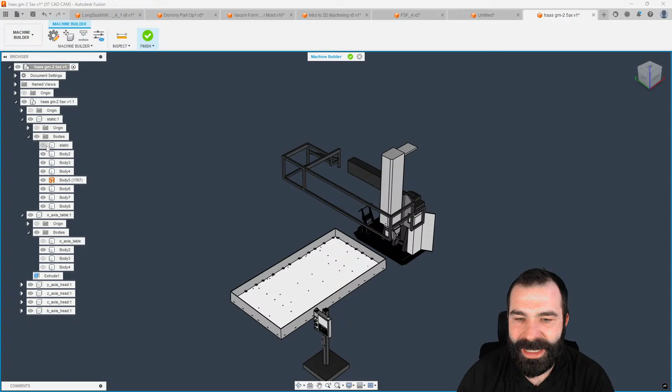So another way you could possibly achieve this is if I edit in Machine Builder, and I actually turn off the components I don't want to see, right? So again, kind of a cheating way to do this at the end of the day. But if I know what I want to see and what I don't want to see, you can get away with it by toggling them on and off. And sometimes that will actually bring that information through as well, right?

What you're seeing me do is I'm getting rid of all this additional stuff that doesn't make sense to be in there. And now I've cleaned up that file quite a bit. So if I hit Finish Machine Builder, sometimes they fix it, sometimes they don't. It works some days. So what we can do is we can now go back into Fusion, bring through our latest version, and let's see if it actually took, right? Again, we're going to simulate with machine here.

And now that I've hit all those bodies, as you guys are seeing, if I turn on the base, it's only that one item in my way if I'm really trying to see this without everything else, right? Like, it looks cool the first couple of times you do this to see the sheet metal and everything. Now it doesn't even matter. And so you guys know we could even turn off that actual frame up there as well. You don't need it on because we've already set how to do it.

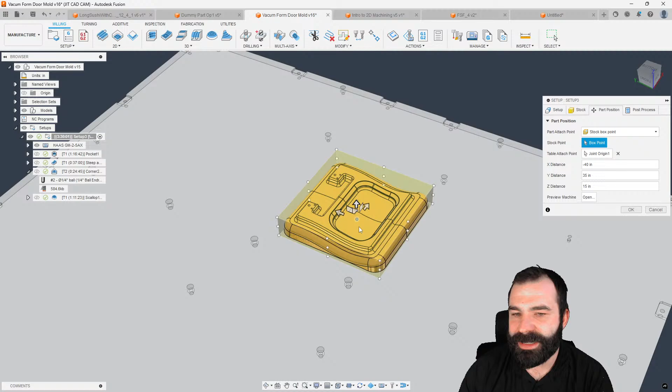So, Harm, great question. How do you rotate your part? I have selected my machine and I can't change the position, but do not know how to rotate it. So everything is defined by your XY selection, right? So if I actually look at my part position here, notice how this elongated pocket runs the length of my table, right? So that elongated pocket is actually my x-axis. So if I change my x-axis to point a different direction, I'm going to go ahead and use this plane here. We're going to say the x-axis goes off this plane.

Again, my origin has moved. The key element here is my X now runs lateral. Notice how my part has now clocked itself 90 degrees to the table. Now, that's how I can rotate the part technically. So I want my X, Y, Z set on my part, of course, the correct way.

Now, if your machine's X and Y is wrong, we would have to go through that whole process all over again of putting that machine and fixing the machine sim and how the machine sim operates, right? So you would have to come all the way back, Machine Builder, edit machine. And again, what you would do is you would redefine. So if I wanted to flip X and flip Y, I would have to unselect these two and then reselect them in your tree, right?

In this case, I'm not going to go through all that. What I'm actually going to do is we're going to turn everything on here, but I am going to turn off the entire component for X, again, creating that update, right? So you would just redefine what is your X and what is your Y, if that makes sense.

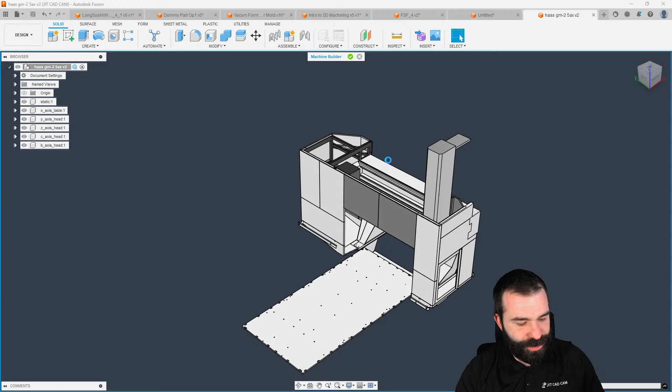How would you rotate it so it would stand on its side? Same concept applies, right? So if I wanted to take this part in particular, go ahead and regenerate this real quick. There's my toolpath. Again, the way I define my X, Y, Z in my setup defines everything, right? So if I wanted to stand this part up like this in my machine, I would need to define my Z axis. I'm going to use this edge right here.

Maybe. Let's use this edge. Oh, no, we can't use that edge. So we're going to have to go back, use planes here. Let's go ahead and unselect. Let's get our origin turned on. So I want Z axis now up, right? If we look at our part position on our table, notice how my part is now standing up on my table. Also notice that that giant weldment is no longer in my way, making my life much easier. Again, pro tip for you guys to be able to set your stuff up the way you want.

And then from there, when you simulate, you would see everything is now repositioned and it should now simulate out with it standing up. I can already see that my toolpath is coming in the right way. I'm going to turn off that origin real quick. And as you can see, we now have our part and I'm machining on the end of it. So again, by defining which direction your Z, X, and Y all point, that changes how it actually sits in your machine sim.

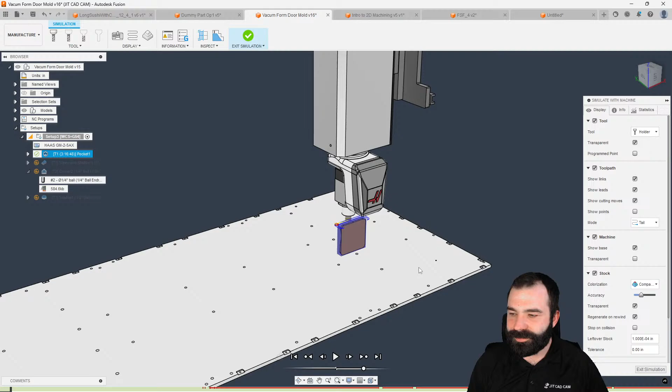Another couple of things I think people fail to realize is you guys probably all see me making a bunch of moves here constantly, right? So if I wanted to look at this part in a specific direction all the time, you do have different features. For example, named views. If I right click and I say new named view, I could say this is 3D part, right? You can use these named views for whatever you want inside of Fusion. And what it will do is it will automatically jump to those positions.

Now, in this case, when I jump from one back to the other, notice how it keeps me at the same distance. So if I was to zoom in here and then right click back on 3D part, I can update that named view at any time. Again, making it very easy for you guys to jump around and look at different sides of your part when you're actually working on it. You can name these just about anything you want, put them in any orientation that you want, so forth and so on.

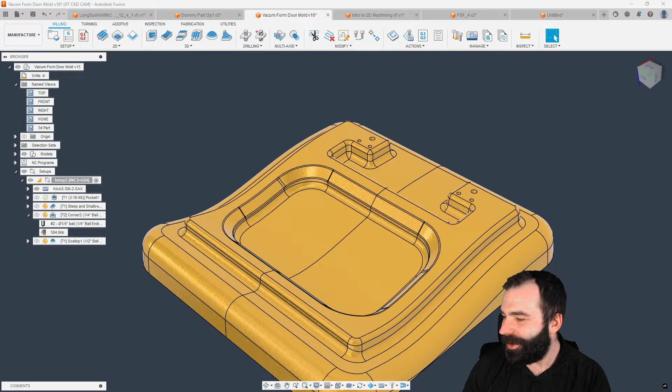It's only the middle of the month. You guys don't have anything to do. You guys aren't trying to make the month, right? You're going to hang out here and watch me mess around in Fusion. Going once, going twice. I see you guys out there. Anybody have any questions at all? Did I start my outro? That usually gets me another question. Always does.

Regenerate the rest of these tool paths. Oh, I'm going to fix our XYZ here.

Still not seeing any questions. That's good. Either you guys got all your questions answered or you guys are just speechless at how bad I am at this.

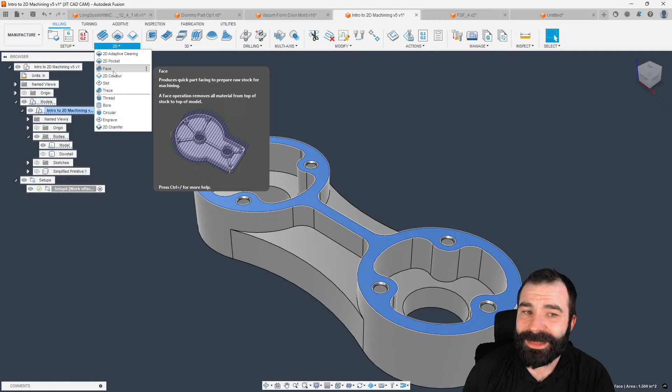So of course I start in my setup area. We say new setup, my XYZ direction, create my stock. From there, I tend to go straight into roughing. Now, if I'm working with a really large part, I may choose more of a pocket clearing strategy. And again, I don't like to face off; in this case, this part only has this little bit of flat. So I personally wouldn't waste my time using a facing operation unless, again, if I was using a big part, I'm going to reuse that tool.

On the backside, I might want to face because I have a much larger flat area. But I tend to jump straight to 3D, and I'm a big fan of just adaptive clearing. Again, this really depends on your part size, but we go for that flat end mill.

From there, we could go ahead and let it do its thing. I do have to say, as you become more and more familiar with Fusion, the way you set up your tools makes this much easier, as you guys see. For example, this tool only has one speed and feed.

It's not using step over or step down, which can make a big difference to the way you program as well. So if you have those tools properly defined, if I was to swap out this tool here real quick and show you, go back here. I thought I had one somewhere else in here. I do. So let's say I use this half inch flat end mill.

Notice how it's got a bunch of speeds and feeds tied to it. This helps a ton for me to quickly grab something like roughing, right? And then what you'll see in here is it also has set up tool step over and step down. Let's see if you can see it in this menu.

So use step over true, how much is my step over? Use step down, how much is my step down, right? So when I hit select and OK this time, what you're going to notice is it's automatically converted everything over for me. So I tend to use the strategy of prepping my stuff right so it automatically does everything. As you can see here, this is a relatively simple part.

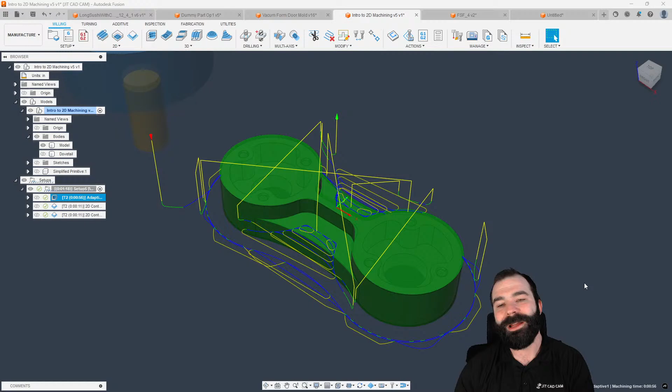I tend to stay with my bigger tools as long as I can in most people's cases. This part, there's nothing wrong with making those changes along the way. It just really depends, am I going to finish with this tool later? Then I could put it away and go smaller. If I'm going to finish with it now, as you're seeing, it might be easier to keep that tool, right?

Milan, I see you out there. Easy one: how to enable sub-spindle part grab transfer in a 828D post.

How to enable, is it not in the post by default? Let's find out. Post library. And that is turning. That's Siemens, right?

Oh, hold on there. We're going to go back in there. Benjamin, I appreciate it, I love the thanks. Again, we're going to go, what is that?

828, there it is. So what I'm going to do is we're going to go ahead and copy this into my lovely folder for us to delete later, as you guys know. Now I'm going to edit this post. And the question was about the sub spindle.

Let's go ahead and find sub. There may not actually be any sub spindle in here by default. Let's just take a glance here. Sub programs, let me make sure you guys aren't trolling me. Are we sure this isn't a milling post and not a lathe post? Millings and machine simulation, so you can't do anything, that is a mill post.

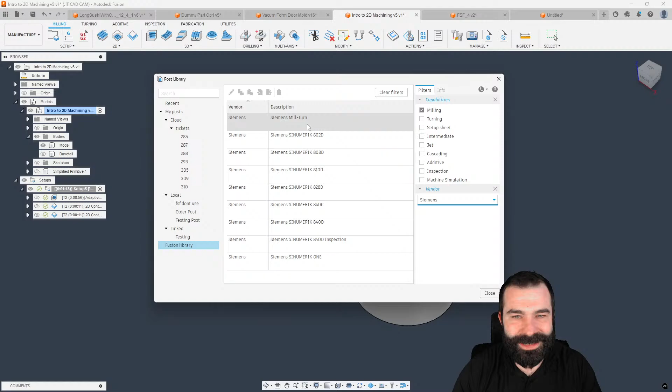We're going to go ahead and copy this, and we are going to throw that again back over in this other folder that one day I will eventually get this all cleaned out. So let's edit this. First we're going to look for sub spindle. So we do have sub spindle, of course, it is definitely in here. But let's start with the basics, right? So we're going to go ahead and I am going to pull open a lathe part here.

And let's just go turning Tuesday. The more you guys do this, if you ever end up on this side of the computer, you're going to have like a handful of parts you always have ready for questions like that.

So let me scroll back up. We are going to do a sub spindle grab/transfer, right? Here is my sub spindle grab. I'm actually not going to do a bar pull, and we're going to leave the part off. So we're going to do a sub spindle grab into a sub spindle return. Let me make this a little nicer so you guys can all see what I'm doing. And we're going to post process this using none other than that post I was just griping about.

So as we can see here, we're going to double verify a few things, make sure there's nothing we need to turn on, like has sub spindle. I'm not seeing anything, and we're going to hit post. Now we're getting an error: stock transfer is not customized for your machine. So that's error 2576. Let's take a look. 2576 is going to be a ways down.

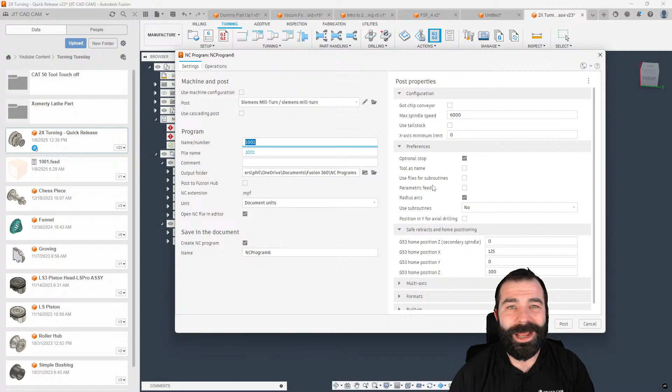Nope. And the reason why I wanted to do this is because I wanted to show you guys, very commonly, what happens is you do break this stuff. Happens to all of us. Again, anybody out there that's watching me right now, I never took a course on Java or how to program this stuff. Trial and error and years of experience, right?

So what I'm going to do is post this again. I'm going to get that error again. That's a good thing, we got an error, right? So again, we know it's not customized, right? But this time, before I ever edit the post processor, what I'm going to do is post again, and this time I'm actually going to use what's called the export CNC file to Visual Studio Code. Because what this is going to do at the end of the day, we're going to just make this 1111, I guess, is it's going to create me a debug file automatically, right?

So when I'm in the Siemens post now, I have to install the post utility tool to do this. Going down to the custom area, CNC selector, custom, raising this up for you guys, we're going to go to the 1111 we just wrote. But I can't click on it yet because I'm still in the wrong window, so let's go back and click on 1111.

What you're going to notice is it's now errored out and given us that error. So if you ever want to come in and start messing around in a post, anytime you make changes like this, we're going to delete this, put the asterisk here, backslash, and I know I need to do the slash. There we go. Down here at the bottom, I'm going to remove this one causing the error, and then remove this one as well.